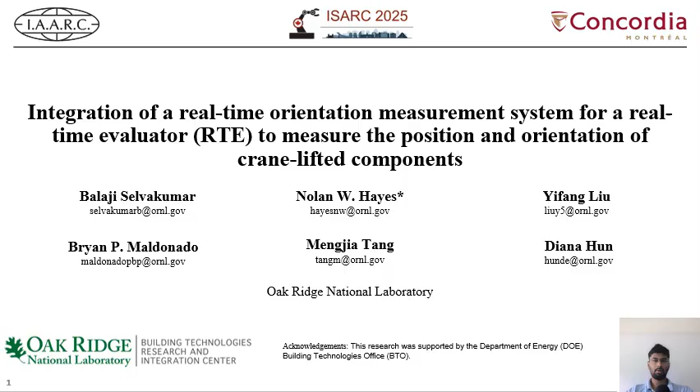Hello everyone, my name is Balaji Selvakumar and today I'll be presenting our work on the integration of a real-time orientation measurement system for the real-time evaluator or RTE to measure position and orientation of crane-lifted components. This research work was conducted at Oak Ridge National Laboratory and supported by DOE Office of Energy Efficiency and Renewable Energy.

The primary goal of our real-time evaluator project is to automate the tracking and installation of prefabricated construction components with higher accuracy using a single robotic total station. This system aims to reduce the time and cost associated with installation of prefabricated components in construction, and also the equipment cost by providing real-time installation feedback through a graphical user interface.

Using off-the-shelf construction hardware components, we have developed a system that not only reduces installation time and rework at the job site, but also enhances quality control and minimizes the on-site disruption and wastage. This year, we have made the following changes. We have moved on from Bluetooth communication to Wi-Fi communication for seamless sensor fusion between the total station and other sensors for extended range and stability.

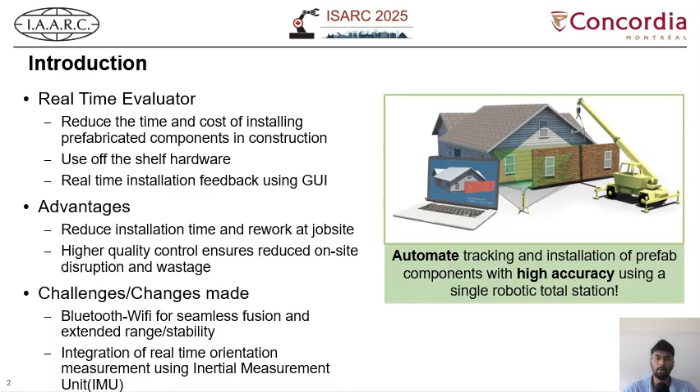We have also added a real-time orientation measurement unit using an Inertial Measurement Unit or IMU. This tracks the orientation and provides orientation updates in real time. Our system is designed to track the installation process and provide real-time installation commands as feedback. It can be used for retrofitting older buildings and newer prefabricated construction projects.

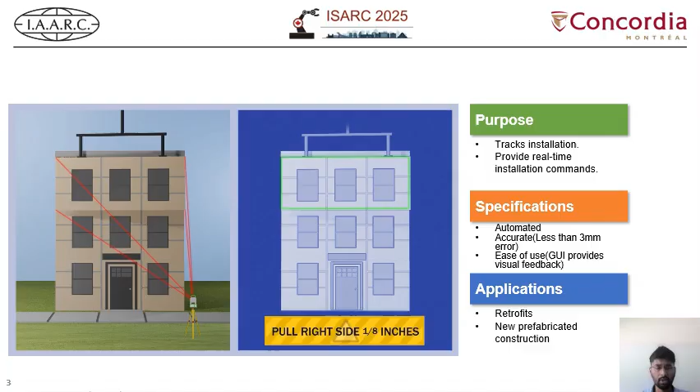The key specifications of our system include automation, accuracy with less than 3 millimeter error, and ease of use. This system's ability to provide real-time feedback is crucial for ensuring that the components are installed correctly the first time, thereby reducing the need for costly and time-consuming rework, thereby saving time.

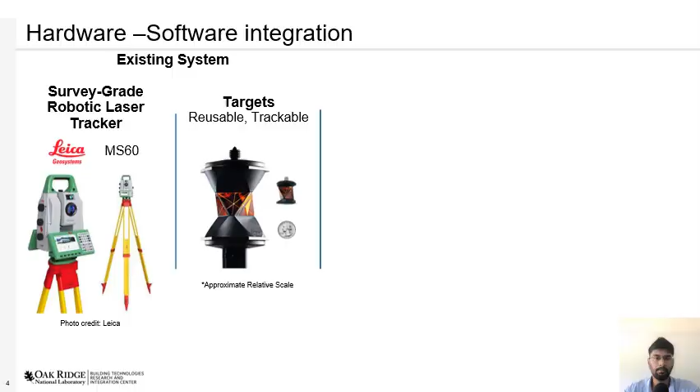Our existing system consists of a single survey-grade robotic laser tracker such as the MS-60 and reusable trackable targets such as 360 prisms from Leica. These prisms are mounted on the panels to be installed and are then tracked using the laser tracker to provide real-time position information for the user or the crane operator. We have also added real-time orientation measurements such as an IMU for providing real-time orientation wirelessly.

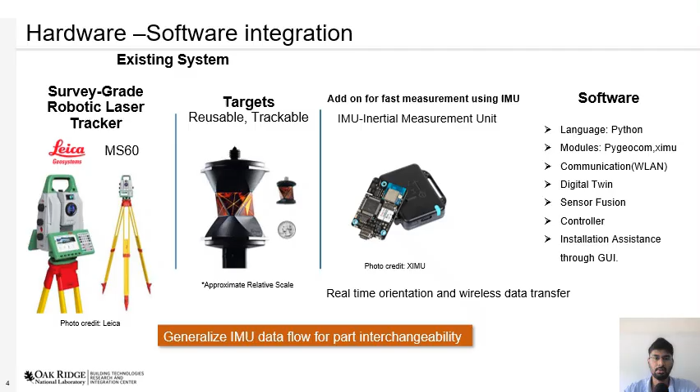So the software component is developed in Python and includes modules such as PyGeocom and XIMU for sensor fusion and comparison with the digital twin and provides installation assistance through the GUI. This integration of hardware and software allows for seamless communication, ensuring that the system operates efficiently and accurately.

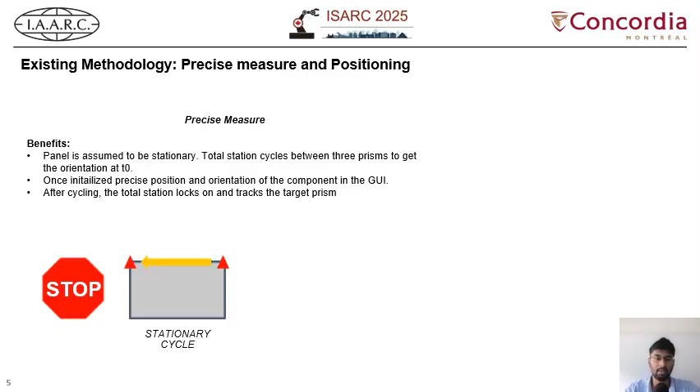This precise measurement capability is essential for ensuring the components are installed in the correct position, which is critical for the structural integrity and performance of the final construction. For the precise measure function to work, the panels are assumed to be stationary. The total station then cycles between the three prisms to get the orientation at time 0. Each cycle takes around 12 seconds. Once the panel is initialized, the precise position and orientation of the panel is updated in the GUI.

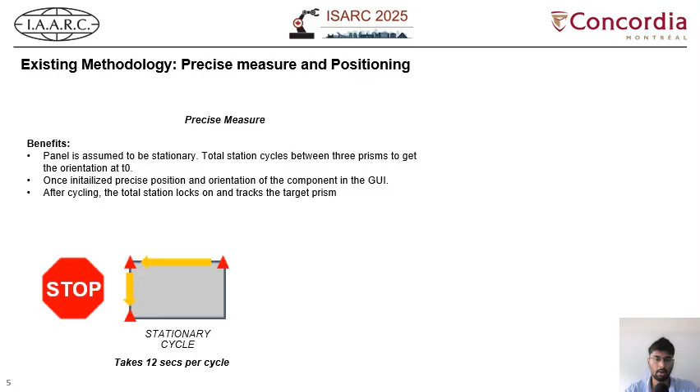After cycling, the total station locks on to the target and tracks the target prism, thereby providing positional feedback in real time. And in order to get the orientation, the total station has to cycle between these three prisms again to get precise orientation. And while it's locked on, it can provide live positional feedback and compare with the digital twin on where the panel is supposed to go with respect to the panel location.

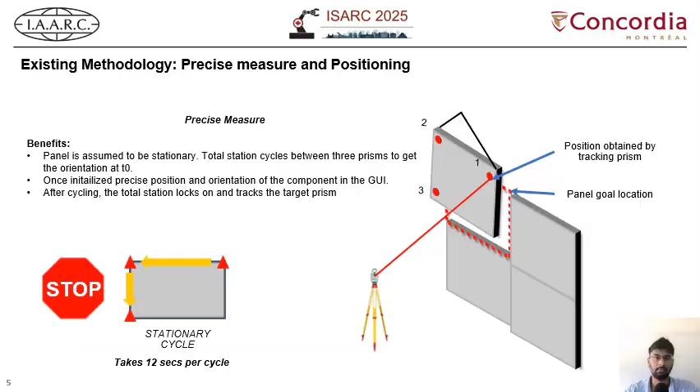When the panel is being tracked, it is not possible for the total station to cycle in between the prisms to get the orientation. So we have added a real-time orientation measurement with an IMU in the loop. This provides approximate orientation updates to the GUI. In order for the IMU to work, it has to be initialized with the panel's reference system for real-time orientation measurement.

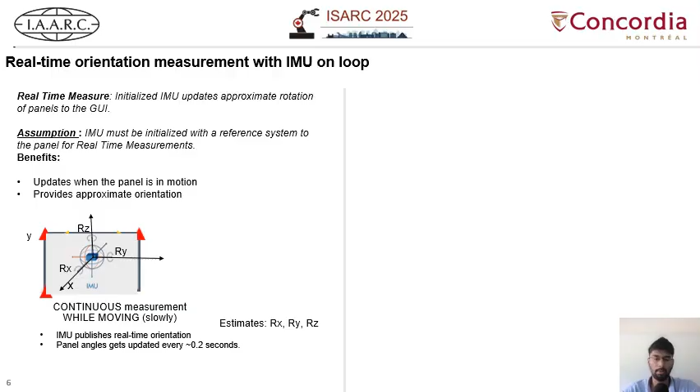Once the IMU has been initialized, it can provide approximate panel orientation when it is in motion while moving slowly. The IMU publishes real-time orientation every 0.2 seconds, thereby providing feedback on roll, pitch, and yaw angles. This integration ensures that the RTE is able to provide both position and orientation feedback with 6 degrees of freedom at an accuracy of less than 1/8 of an inch.

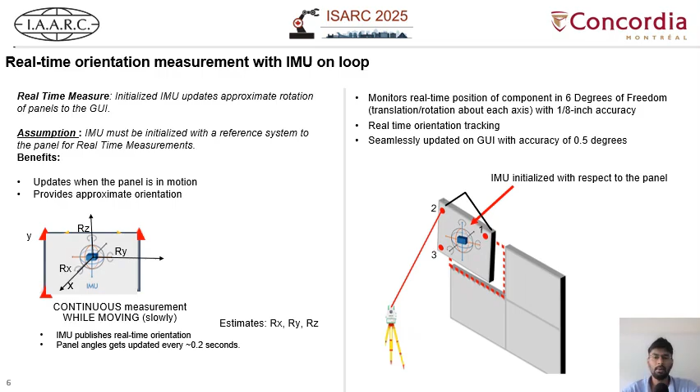So for the selection of the IMU, we conducted lab scale tests to compare the IMU's accuracy with the AT960 tracker. The AT960 tracker is a highly accurate device used as a ground truth. We conducted both static and dynamic testing and evaluated the errors in roll, pitch, and yaw angles of the IMU.

During the IMU testing, the movements were executed at higher severity than expected during normal crane lifting operations to ensure robustness of the sensor. The results showed that the IMU is able to provide accurate real-time orientation measurement with reduced drift over time. The validation process is crucial for ensuring that the system performs reliably under real-world conditions, thereby providing confidence in its accuracy and robustness for integration.

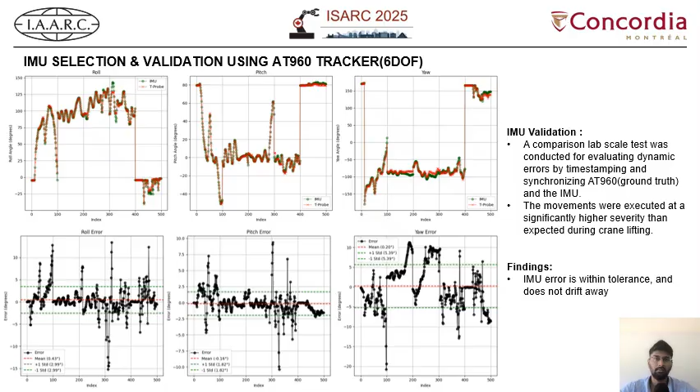So for our lab-scale prototype experiment, we have created mock-up panels at the scale of 1/3 of the panel retrofit. The panels are mounted on the connection points located on the walls, and they are controlled using a simulated crane. The prisms are mounted on the panels along with the IMU, and once the total station is initialized with the panels by cycling between these three prisms, it is able to provide real-time position measurement.

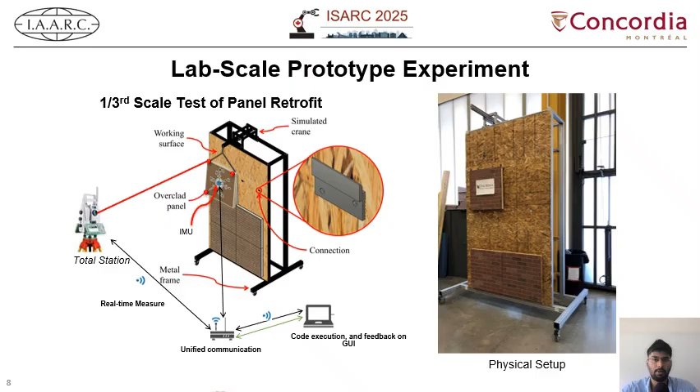At the same time, the IMU is initialized along with the panel, and this provides a real-time orientation measurement. The readings from both these sensors are fused in our software, thereby providing a unified position and orientation on the GUI. This position and orientation measurement is compared with our digital twin to give the error matrix. This prototype experiment demonstrated that the system is capable of handling real-world scenarios, providing valuable insights into its performance and potential areas of improvement.

We compared the performance of the real-time evaluator with and without the IMU, and the results are summarized in this slide. The green color is the goal location of the panel, and red color is the live location of the panel that is being tracked by the real-time evaluator. So without the IMU, the total station only locks onto a single prism and tracks the position. But with the IMU integrated, the IMU is able to get the real-time orientation measurement, thereby providing real-time orientation feedback on the GUI.

Again, the green color is the goal location on where the panel is to be placed in the digital twin, and red color is the live location of the panel.

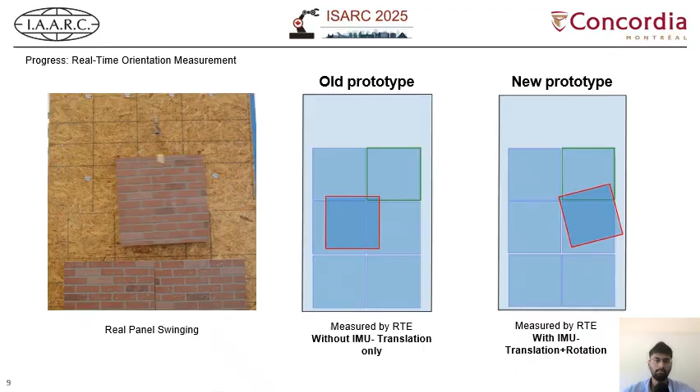In conclusion, we have successfully integrated an IMU for real-time orientation measurement, which avoids the need for cycling between tracking operations and reduces the measurement time from 12 seconds to 0.2 seconds. This system provides a robust solution for accurate installation of prefabricated components in construction. We have also switched from Bluetooth to WLAN communication for optimal sensor fusion between devices.